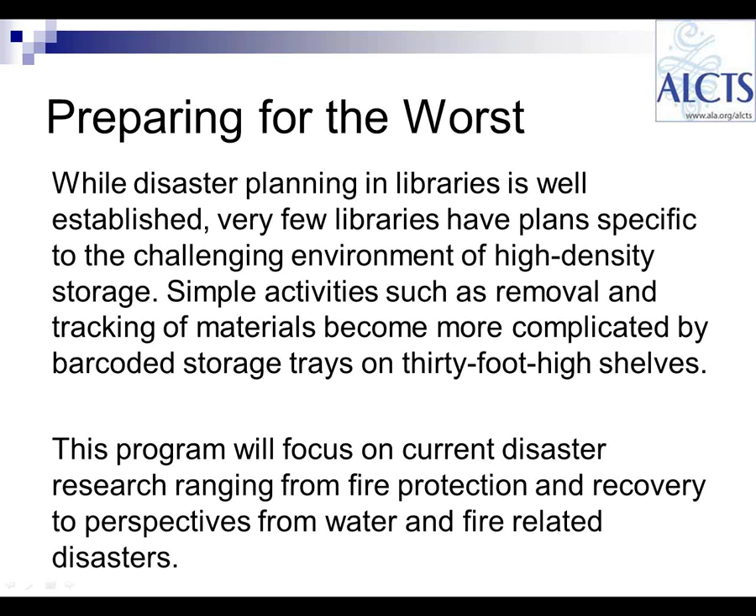Yeah, so I'm going to give a little bit of background to the project that I'm going to be talking about while everyone is answering the poll question. So about 7 years ago at Midwinter ALA, the ALCTS Preservation Administrators Discussion Group held a panel discussion on emergency preparation for high-density facilities. The panel consisted of Tom Schneider, who was then at Harvard Storage Facility, and Janet Gertz from Columbia, who was talking about the RECAP facility, which is shared by Columbia, Princeton, and New York Public Library. So Tom and Janet talked about the challenges of protecting materials in these types of facilities.

And then there was a third panelist, Tom Gately from Copper Harbor, who's a risk management consultant. So that was sort of the basis that set off alarms after the presentation, and I'll talk a little bit about why.

How are we doing with the poll? We're closing it. Okay, so my screen, can people see that yet? I need to have my screen. Show my screen. We can see you. You can see it.

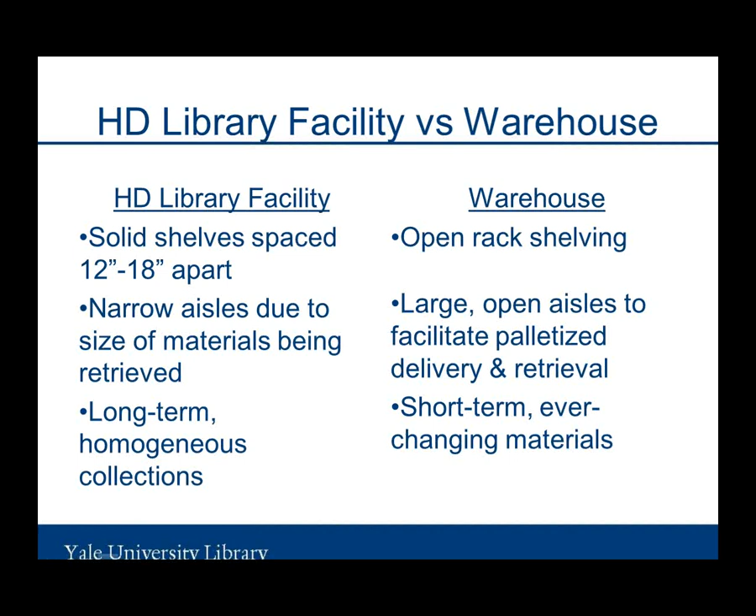There are three key differences between the interiors of warehouses and high-density library facilities, and they're listed here. The two that I really want to stress are the solid shelves and their spacing, and the narrow aisles due to the size of the materials being retrieved, which are books. We don't need huge aisles.

So immediately following the panel discussions at ALA, a number of the preservation librarians got together and wondered, what could we do to address some of these significant differences and the risks that they may present? Well, at ALA, things don't always move so quickly. So in June, 6 months later, we got together and tried to figure out where do we go from here, and we decided to contact Tom Gately, who then suggested two things. First, contact FM Global, and second, determine an approach.

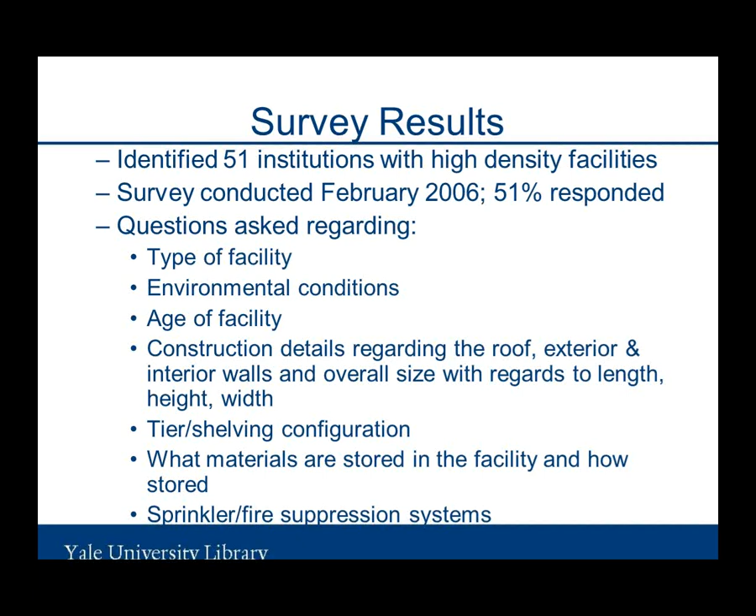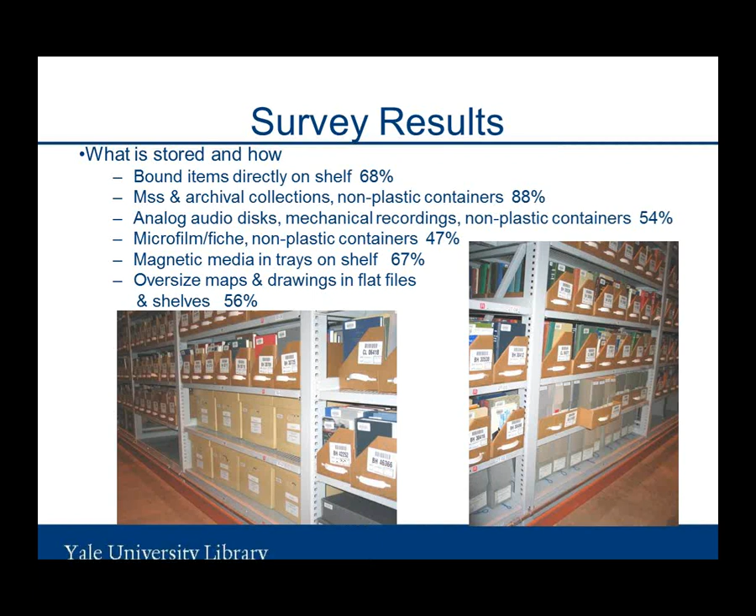The slide here gives some idea of the general categories of the questions that were asked. And in fact, some of the institutions who are attending the webinar may have actually participated. The survey also included questions regarding what was stored and how. This information was then used to create the mock scaled facility at FM Global that was used in the various tests. The slides that I'm showing here are actual facility slides. Later on, I have some pictures that were provided by FM Global.

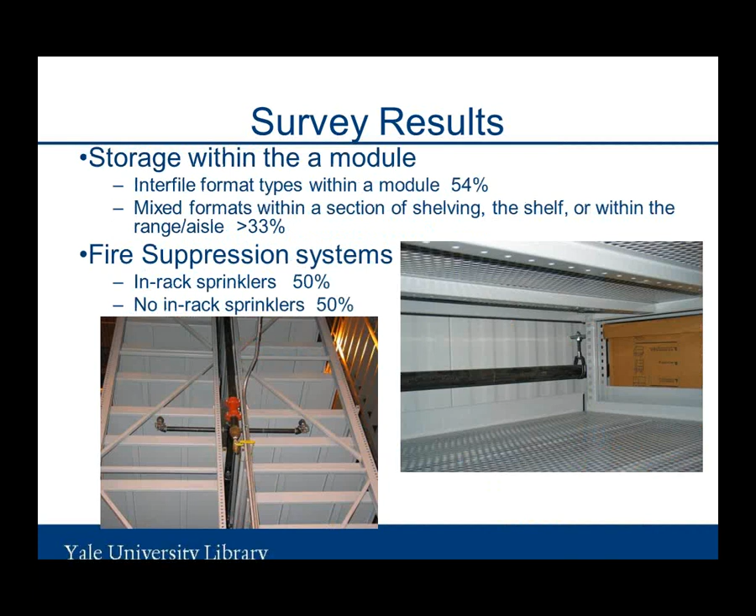So the survey also asked about what was stored in the module and how, as well as the sprinkler head arrays. And I've got pictures here of what is called in-rack sprinkler heads. And I'll talk a little bit more about what that means by in-rack. But I want to talk about what our timeline was. So with the survey in hand, we all met to see what our next steps would be and explore the viability of the project, and that meeting was in July 2006.

In May 2007, we heard that FM Global had approved the project and Dave Fuller was officially on the project, and we now had a research engineer, Kristen Jamison. So it took almost a year for the project to be sort of articulated and then presented to the FM Global higher-ups who would approve the cost involved with all these tests. And I want to stress that FM Global took on the entire cost of all these tests.

In February 2008, the consortium members got an update after the first set of tests and to reaffirm what our goals were. And then March 2010, the tests were complete and there were some preliminary results and recommendations. But before I get into all that, I do want to talk about what the goals of the project were. So we wanted to know what were the fire protection options for this type of facility. We knew what most facilities had, but we wanted to know, was that good enough and what happens if we changed it? We also needed to control the degree of damage.

We wanted to lose as little materials as possible. We all agreed that wet material was not necessarily lost material. This was sort of a revelation for FM Global. They were concerned also about how much got wet. So were we, but they didn't realize that we felt that wet material was recoverable. Then we wanted to know what to do in order to have the best possible protection in new facilities.

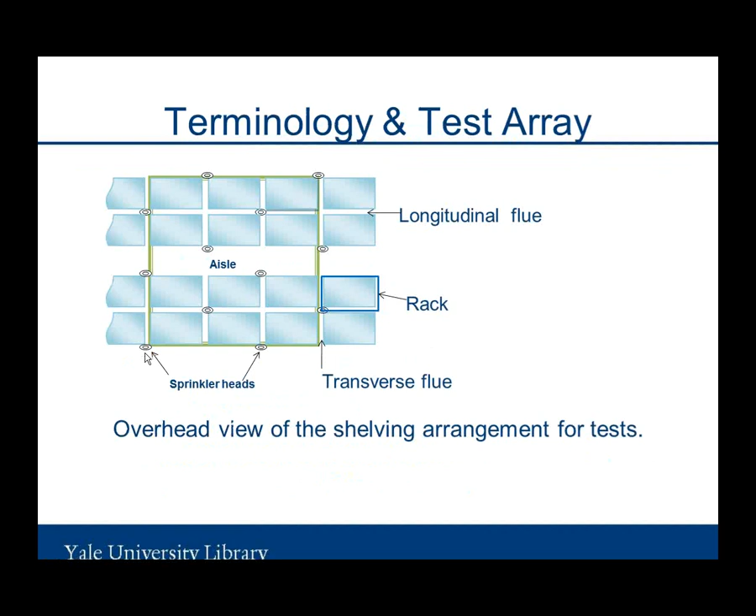Test number 2 had essentially the same setup, but they mixed what was on the shelf. It was books and trays plus archival boxes on shelves. The third test, the sprinklers were the same, but they added face sprinklers, and I want to show you what those were. These were the in-rack sprinklers, and actually there was a sprinkler at each intersection. What they did for the third test is they added at the same level, the 10-foot and the 19-foot level, what they call face sprinklers right in front of the shelving units. So that was the big difference between the first one and the third one. They also had a mix of the books and archival boxes on the shelves. So the results.

Early detection means faster reaction and less damage. So smoke detectors are a given, and their tests all had smoke detectors. They considered that the first line of defense. Then the next one was the in-rack and the ceiling. They decided that provided good protection.

But the best was by adding face sprinklers. And what they found was there was 50% less damage due to fire being extinguished faster, thereby limiting fire damage and less water being expended. So you were also limiting your water damage.

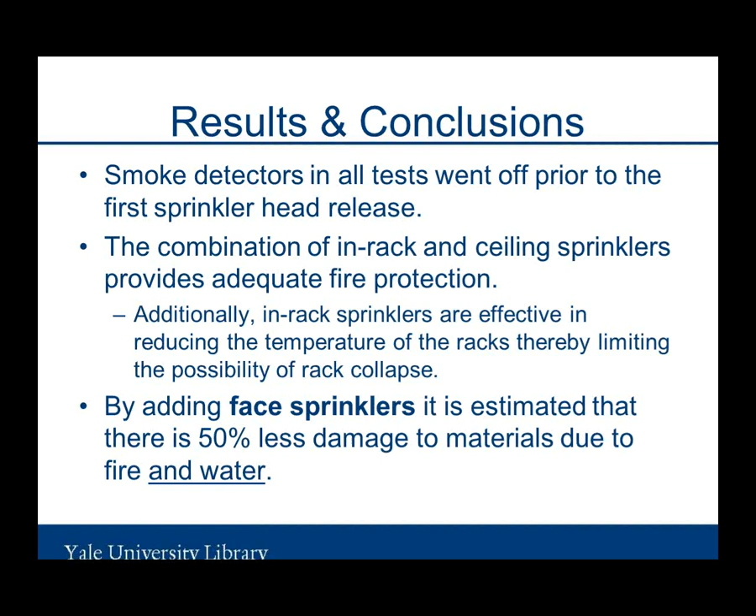Along the way, there were other things that came to light. All of the facilities have fairly narrow aisles. Most of the aisles range from 46 inches to 54 inches. The test aisle was 48 inches. The length of the aisles for most ranged from 190 feet to 215 feet. So you could imagine fire in the middle of a 200-foot aisle is pretty difficult to get at.

And we have to remember that the fire sprinkler system is designed to suppress the fire. It is not designed to put out the fire. It is the fire department that puts out the fire. So we need to keep all of this in mind, and also think about how much material is in just one of those racks. One rack at the 30-foot height is about 400 linear feet, or maybe 4,000 volumes. So you could imagine just involving 2 or 3 racks, you're going to have thousands and thousands of books.

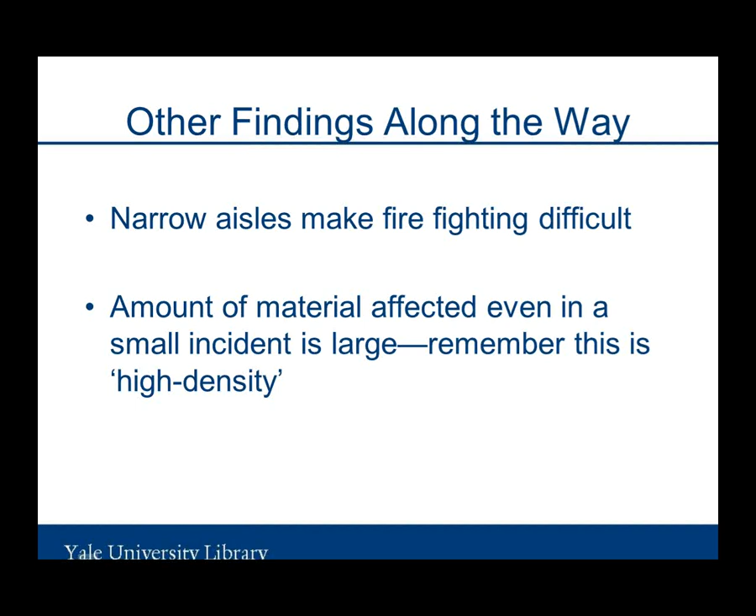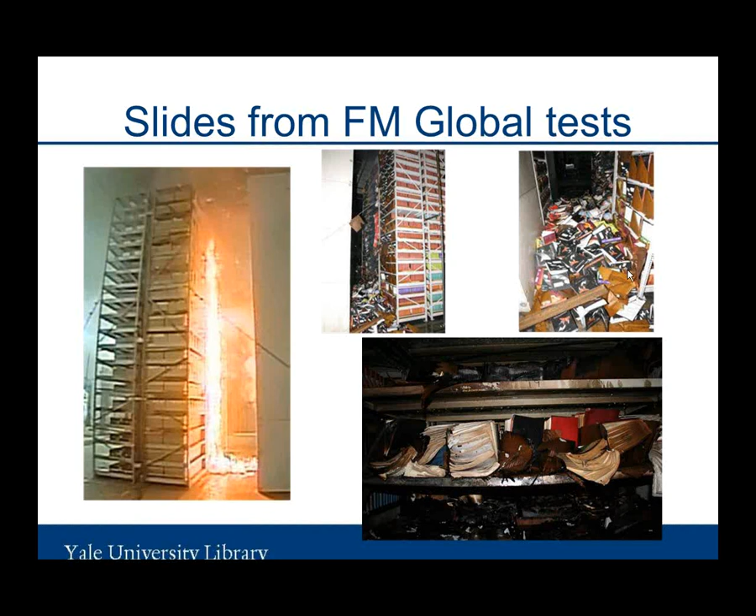So besides the fire and the damage, we have to consider the firefighting in the narrow aisles. We have to consider the swollen books that could not be restrained because the books are stored in cardboard trays. The trays fail and the books expand and they fall off the shelf. So there's a number of things that came to light along with just trying to find out what's the best array for the fire suppression systems.

As I said, the cardboard trays failed pretty quickly, so we're looking at what some of the other options might be. In fact, FM Global encouraged finding another material for the trays, and we did put out an RFI to see if we could find an alternative material or a different way of constructing them. At this point, we've gotten some test results, though they haven't really published any formal test results.

But the upshot is that cardboard just doesn't work. Whether it's coated or uncoated, it doesn't matter. The coated board lasted about 30 minutes, but in an emergency of this size, it may be hours or perhaps even days before you gain access to the area, so 30 minutes isn't going to make a whole lot of difference. The covered trays, which you see here, basically help keep water from coming in and making this into a little bathtub, but there's still water being absorbed from the bottom, and ultimately they do fail.

So, final recommendations. Smoke detectors are definitely a good idea. The in-rack and ceiling sprinklers are good, but the best is adding a face sprinkler if at all possible. The local fire department needs to be familiar with the facility, and remember that the narrow, long aisles can seriously inhibit fire extinguishing, as firefighters will not be able to get a good angle on the fire.

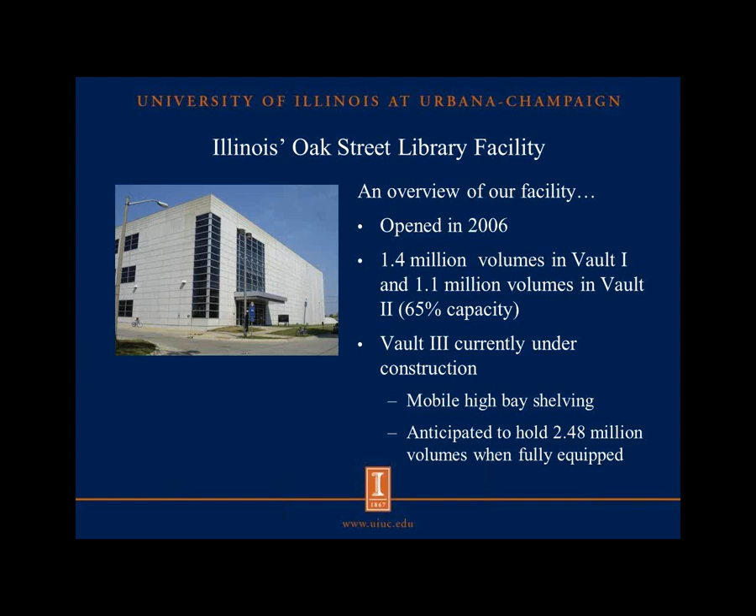So the things that basically made us think about disaster recovery and why this was important was that this really required a unique approach. And so we were trying to look at how to design an overall disaster recovery protocol. How can we move these masses of materials? This is on a scale that we had not even considered for conventional disaster recovery. What types of disasters do we need to plan for?

How are we going to identify materials of high priority in this sort of storage? Because our first vault actually had integrated special collections and non-special collections materials scattered throughout the vault, which made identification of those materials and prioritized salvage really difficult.

And there we go. So basically what we did was to partner for the answers to some of these questions with our engineering program, the Industrial Enterprise Systems Engineering Program, which actually has a small fee-for-service that we can hire either seniors or graduate students in the program to help us think about logistical issues of workflow management and whatnot. And so we saw this as an opportunity to bring some engineering brains to this,

and it actually proved very, very helpful. What we needed to do was first to have them gather some statistical data to look at what our losses could potentially be in this space, to help us really wrap our heads around what are the potential types of disasters that may strike us, what are the possibilities of those, and what kind of losses will we be facing. We hoped that they might be able to recommend some facility improvements to reduce our risks in this facility, and then also to lead us to our first steps in proposing a disaster recovery plan, looking mostly at the retrieval and recovery options.

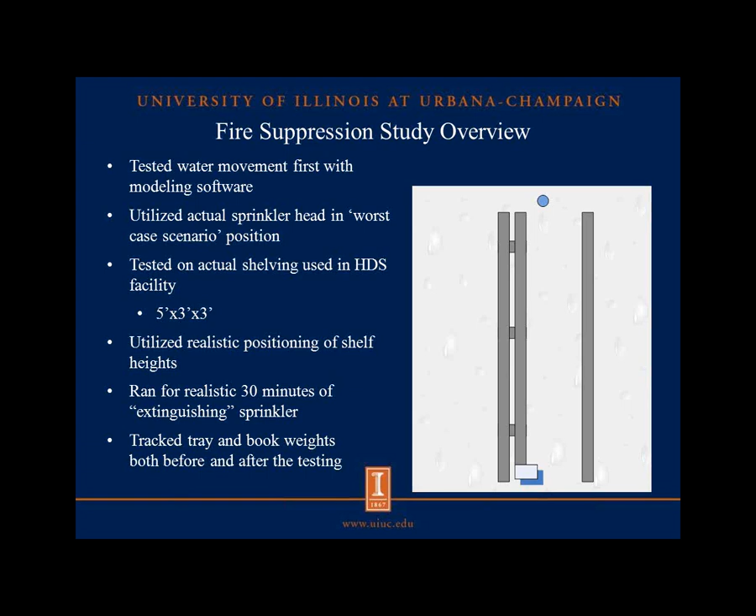We then decided that we were going to track the damage and the weights of materials before and after the water test to see how much water was being absorbed by materials, as well as the observable physical damage that was incurred. So this is a picture of the water modeling that we did, and you can see the cascade effect, basically, that water pools on the top few shelves and then is reduced in the amount of water that's spraying down as it goes down, which is exactly what we expected.

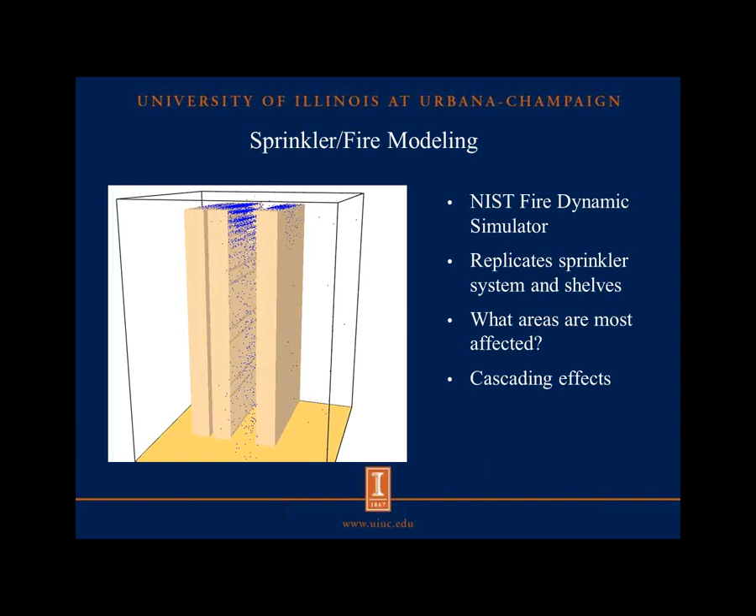After the end of test 1, we actually decided that we should run a second test. And that second test was needed because we realized that we were getting some very disparate information from more archival materials, so things in like cubic foot boxes, and then we hadn't tested what happened with flat files, and we had just opened a second vault at that point that had a bunch of flat file storage in it. So we were really curious about how different types of materials might react in this environment as opposed to just the trade books.

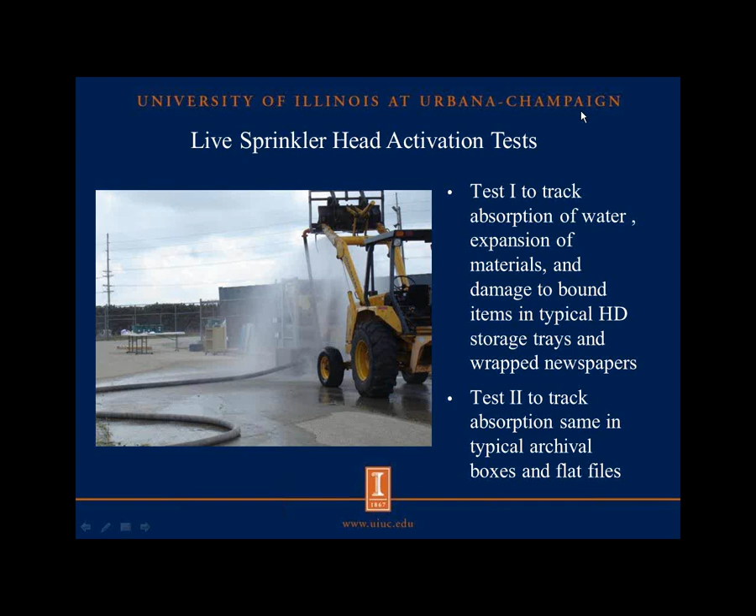Sorry, I accidentally clicked. We have some trade books, and you'll notice that in our test we actually have 2 different colored trays. And the reason behind that is because we had originally planned on having our special collections trays differing from our general collections trays, and having our special collections trays be buffered, lignin-free, higher quality preservation quality board. And so we wanted to test how those 2 trays actually reacted and whether or not there was a difference

between the 2 trays. We then had some large flat trays that held microfilm, as well as some wrapped newspapers, which is the way that we actually store our unbound newspapers in HD storage. And this is just a side view of those same materials.

We then turned on the sprinkler, which ran for 30 minutes, and I hope these pictures convey the amount of water that this sprinkler head put off. Again, this was a higher rate sprinkler. It had a larger orifice than most suppression sprinkler heads. This is considered a deluge head.

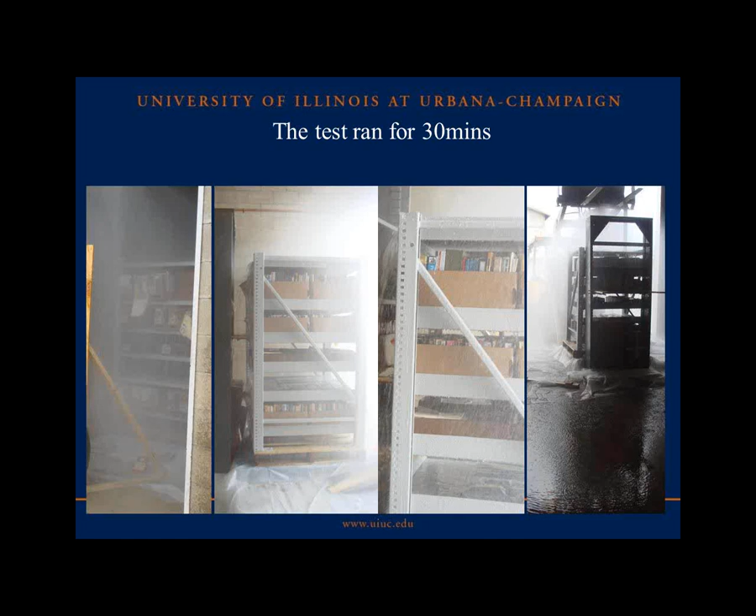But you can actually see the water literally running off in a giant, almost waterfall off the back of the shelf, which, as Bobby explained, with the setup for these shelves would then be going down one of those flues and damaging the materials behind it. And we did have, as you can see over here, a shelf that was actually braced to the back to sort of mimic that flue setup and to get an idea of what kind of damage we might see on the opposite side from that sheeting reaction with the water.

So basically, in a nutshell, what we saw was that in general we saw weight increases. We saw a fair amount of dimensional expansion. The dimensional expansion average was 17%. Obviously that was dependent upon location. It was higher or lower.

Certainly we saw materials with enclosures like boxes showing less weight increase from water absorption than those without enclosures. Generally the front trays held a lot more water than the back trays, which makes sense because the water was traveling down the front of the shelving, not so much over the back.

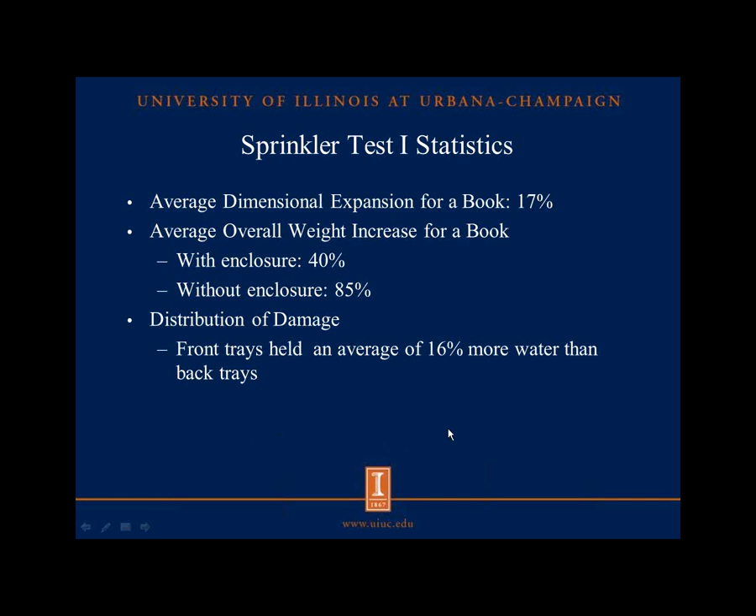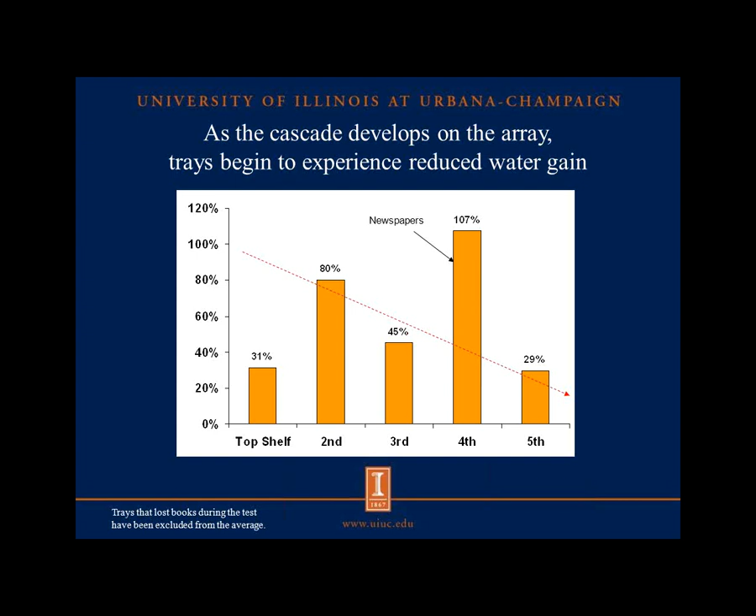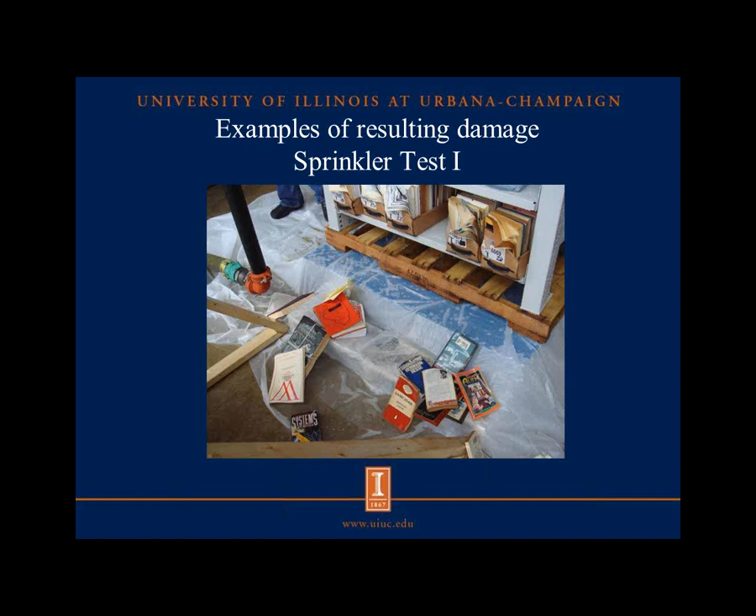But in general, we saw exactly what we expected, which is that the shelves nearest the top absorbed more water, and generally it trended downwards. We, just like the FM Global study, did see books leaping to their death, a much smaller quantity here because we had a much smaller test, of course, but we did see massive amounts of box failure. And that was very disheartening and something that in our plan we're going to have to deal with, how we're going to approach clearing books now from the aisleways and what sort of safety precautions we'll need to take for that.

One thing that we weren't quite prepared for, but once we saw it totally made sense, is that the barcode labels on the box actually sheeted off with the abrasive action of the water. They pulped up as they got wet, and then as they got more and more wet, they actually started to delaminate and peel off. These barcodes on the boxes are actually a critical step in the identification of placement of materials and inventory tracking in these facilities.

And so this was very, very concerning to us because they were one of the key elements in us being able to track the movement of materials if we were to try to extract these from the facility. Even if the trays were physically damaged, we had initially planned on having those barcodes and being able to, at the very least, either scan them in or cut them out or in other ways somehow salvage them to keep them with the materials that were localized to that tray area to help with inventory tracking. But obviously these barcodes are completely unreadable, so that was a concern that we definitely have to deal with.

You can see in these pictures just the awesome power of a sprinkler head for 30 minutes. Not only the aggressive downwashing of the water and the force of that water actually deforming these text blocks, abrading those labels, swelling the boxes, completely abrading what is quite heavy, good quality paper off of our newspapers and completely pulping that paper. But in addition, literally pulping some text blocks of poor quality paper and turning those books into mush. So that was obviously very concerning to us.

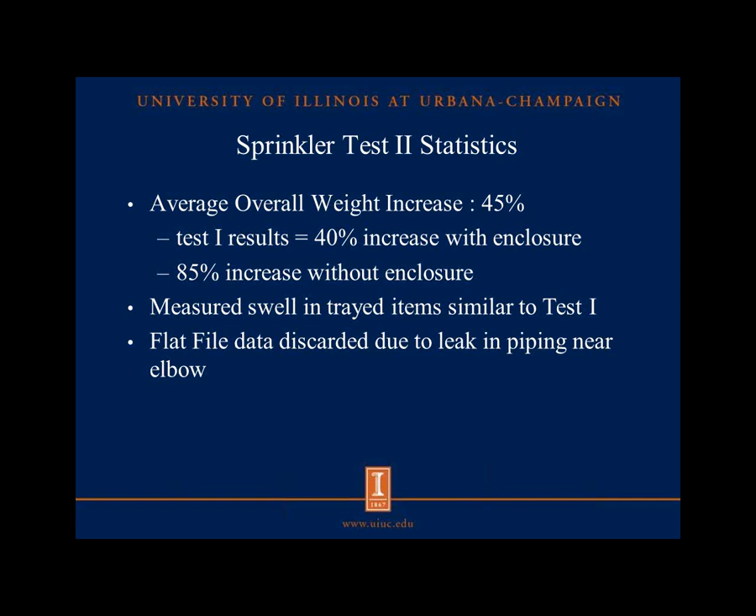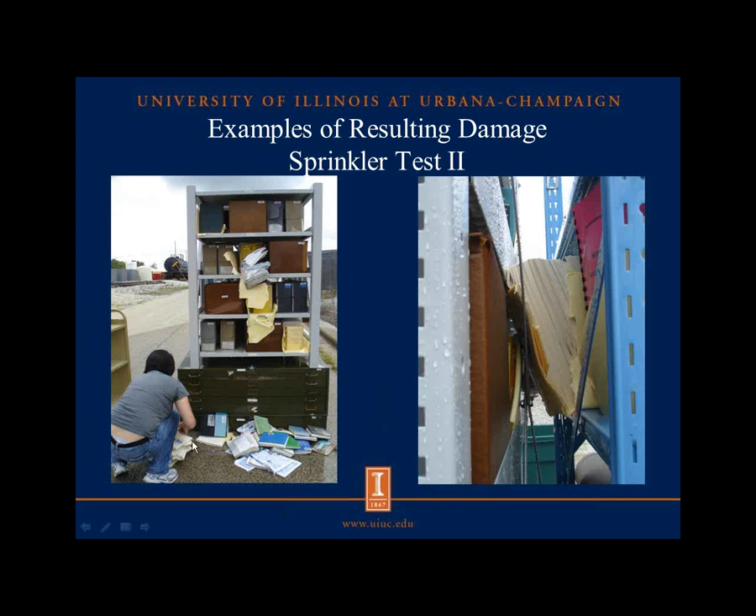Resulting damage, again, was very similar. These special collections boxes were actually the plastic-coated cardboard trays, which we had hoped would actually make a difference, but it did not. Those trays did still fail pretty rapidly. You can see the swelling out the back into the flue, as well as the swelling out into the front, and then the materials actually falling onto the floor surface.

You can see the pooling of the water on the shelves, which Bobby was pointing out. Obviously we're concerned about the bathtub effect of the boxes, that the water pours into the box and then sits there. But even if the box is reasonably tight, or those covered options, the pooling of the water on the shelves and the wicking of the water up into the boxes is still enough to be of concern and to frequently compromise the boxes.

You can see here, for those of you who are preservation folks, an indicative little discoloration there of the very poor quality of the archival boxes that we were using for this test. These were some of our really old box stock and some discarded records that were due for records destruction. But what we did find out was that these boxes, unfortunately, are very, very common, and they were glued together. And at least for this era of glued together cubic foot box, we found that the adhesives actually failed after only a 30-minute exposure to water and then an immediate salvage.

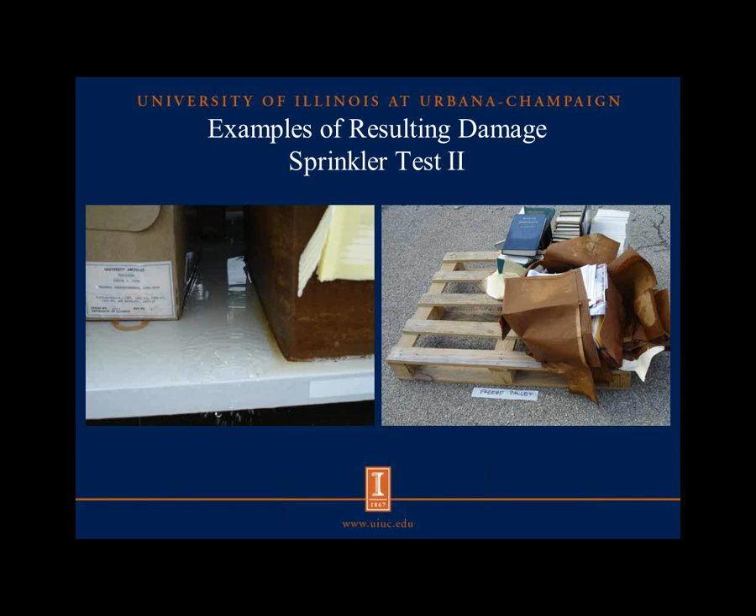So as Bobby pointed out, in some cases we're not going to be able to get to these materials for hours or possibly even days. And we had complete adhesive failure on these boxes within relative minutes, which was really disheartening and frightening, because these were now very, very unhandleable and posed a lot of issues with salvage.

So after we looked at all of this and were able to better wrap our heads around what to expect in a major water disaster when we entered the space, what we also wanted to think about was identification of materials. Originally we had planned to do special collections in these different colored boxes and trays, and had thought we would just be able to do visual identification fairly quickly. But when you're looking at millions of items and thousands of trays, visual inspection really wasn't going to facilitate a speedy recovery.

And as we looked at the failure rate of these special collections trays, we also realized it would be best suited to move our special collections into the more general collections trays, and therefore we wouldn't even be able to rely on that. So for our first module, which had already been populated and where special collections was already scattered throughout the collection, we basically had them create a greedy algorithm to locate the dispersed special collections materials, map them for us, and locate the areas in the vault that had the highest concentrations of special collections materials.

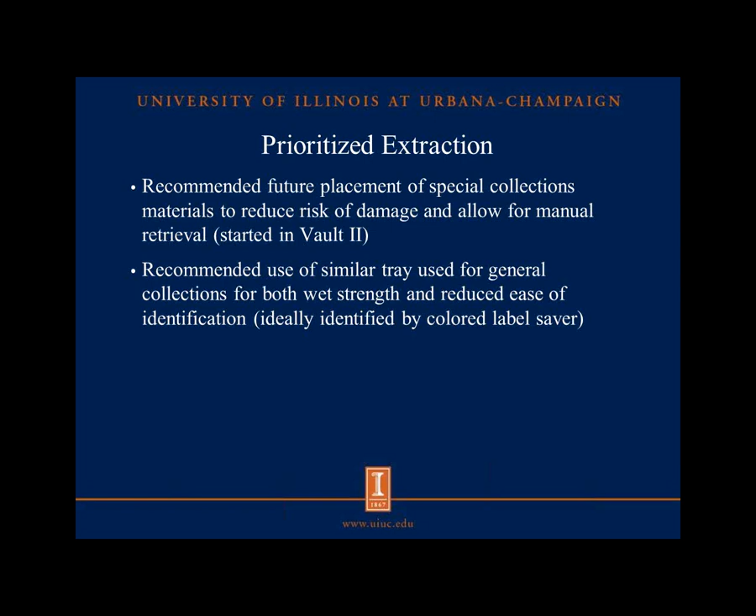So what does this mean for the future? Well, basically we have just finished constructing our Vault 3 with the potential of construction of Vault 4. We have a current disaster plan now which really functions fairly well, at least theoretically, for Vaults 1 and 2, and a plan for how we would recover it. We have actually gone through several meetings and are planning a tabletop exercise to walk the entire disaster team through mock disaster recovery, and I feel like while not all the questions are answered, and we still certainly do have a few holes in this, we do feel that we've got a reasonably good handle and have certainly been thinking about this and are as prepared as we reasonably can be with the amount of unknowns that this sort of

situation presents. But just to muddy the waters, we've now opened up our third module, which has mobile high bay shelving, which is 35-foot tall shelving that is running on motored rails and actually collapses much like standard compact shelving that most libraries are familiar with. This complicates matters considerably, and I will admit that we haven't really addressed how this is going to change our disaster recovery protocols now that we're working in a mobile high bay environment.

But it is going to change our ability to do things like drive forklifts back multiple aisles at one time, or have hand extraction going on in one aisle while another aisle is being opened for the taller recovery. We're really going to be forced to look at an aisle-by-aisle recovery, which could really slow things down considerably. So it is changing. It's also going to change the way we want to prioritize our actions, because we are, again, able only to have one aisle open at a time. So we want to make sure that we're properly approaching the prioritization there and balancing the destructive nature of the disaster and those areas hardest hit, again with those areas of highest priority for recovery.

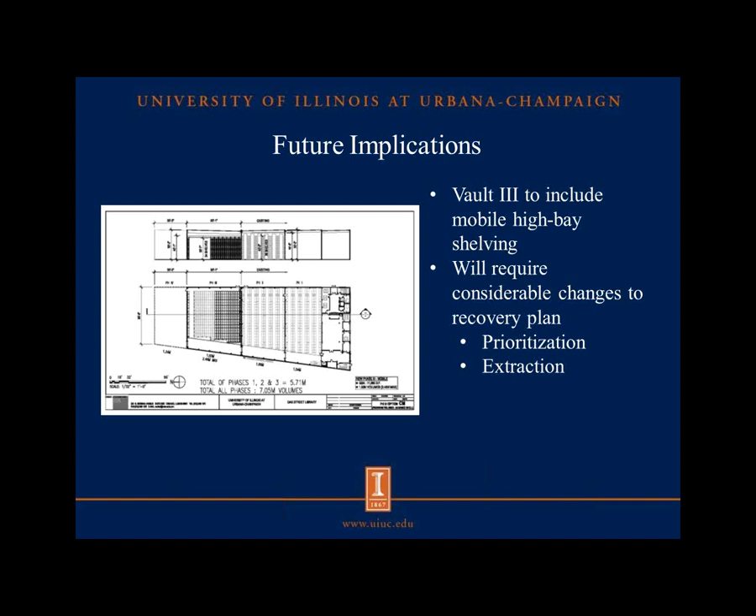So with that, Bobby and I wanted to be sure that we had plenty of time for questions and answers for you all. So I think we've managed to leave a little over 15 minutes, hopefully, and hope that you guys will have lots of questions. And I do see a few here that I haven't managed to look at yet. So I think we'll just go ahead and start with questions and answers. And I don't know, Bobby, if you want to go ahead. Yeah, I'm trying to look at the questions. I'm not actually. Can somebody? We've got two of them so far.

I see something about shrink wrap materials directly on the shelf. If plastics cannot be on the shelf, what sorts of materials are folks thinking of for making a new type of tray? I'm not sure. The whole shrink wrap question for offsite storage or high-density storage, I've heard varying things. I had actually looked into it at one point and talked with the folks who produced the shrink wrap and talked about the fire hazard and whatnot. If there was not a flame source, in other words, if the flame source was removed, it went out kind of thing. So they did not consider it a fire hazard. So if that's where the plastic question is coming from, I don't think that they sort of relate.